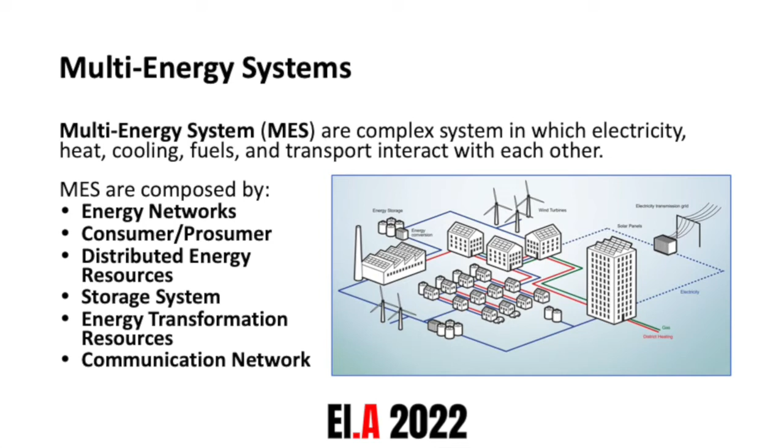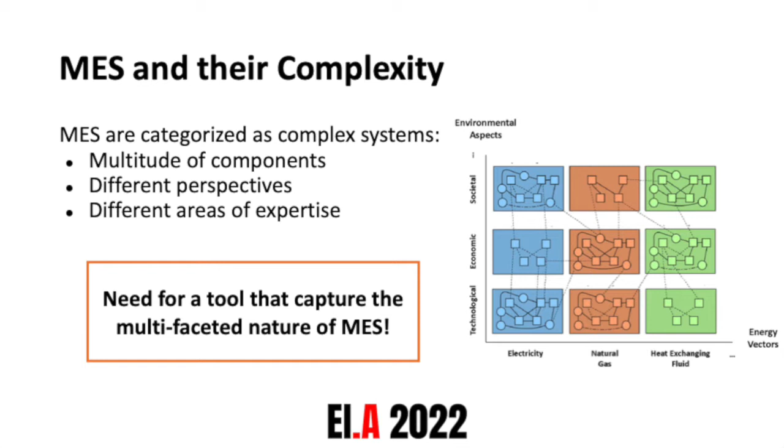Due to the high number of components interacting with each other in this kind of system, multi-energy systems can be acknowledged as complex systems. They can be addressed from several different perspectives. Thus, the study of this system will need different expertises from different fields. Then, in order to properly assess them, there is the huge need of a tool capable of capturing their multifaceted nature. Co-simulation comes into play and answers for this need.

Co-simulation allows to simulate and integrate different domain simulators in the same co-simulation environment. In literature, several different solutions and frameworks are present that address this topic, in particular for what concerns smart grid. Here we present some examples of this, especially focusing on the multi-energy applications. Our objective is to perform a framework comparison in order to better understand them and to help in choosing the right tool for the right application. In particular, we will focus on the scalability.

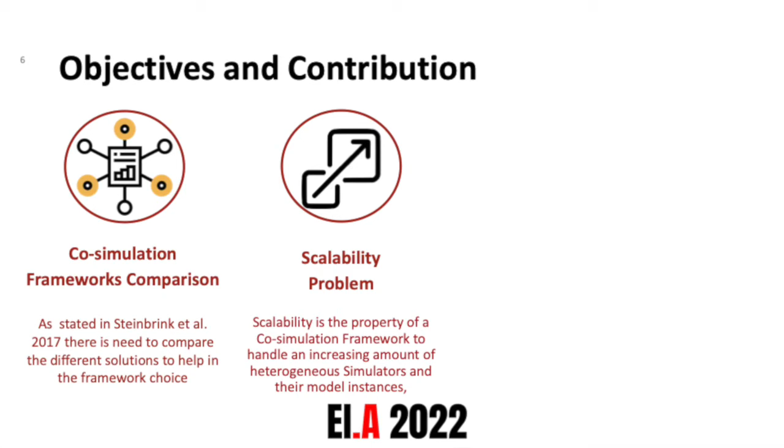Scalability is the ability of the co-simulation framework to increase the amount of heterogeneous simulator and model instances both vertically in the same node and horizontally on different nodes, distributing the problem. The chosen frameworks for the comparison are especially Mosaik and HELICS, which among the multitude of co-simulation frameworks for smart grids are the more generalizable and more prone for the multi-energy system extension.

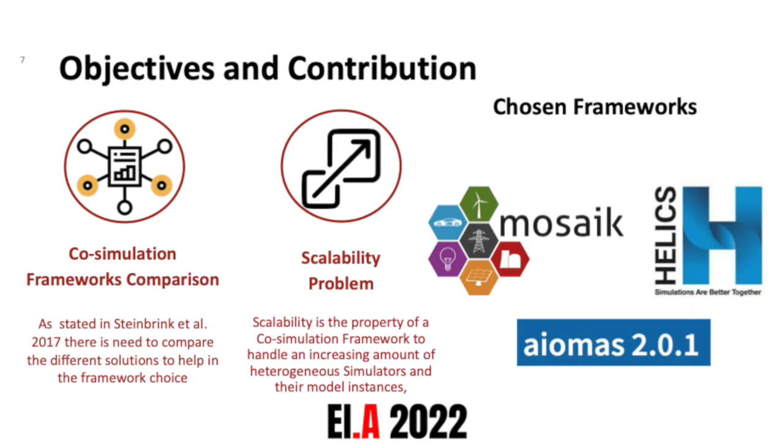In addition to this, we have chosen them because our work is based on the baseline of Steinbrink et al. 2017, which compared high-level architecture standards such as HELICS with Mosaik, without taking into consideration the scalability perspective. Finally, we also included the AIOMAS library, which is a Python library used to build multi-agent systems, and later on we will explain our parallelism between the co-simulation frameworks and the multi-agent system.

Co-simulation frameworks have a common architecture that can be generalized by analyzing its components. Every co-simulation framework must have a scenario, which is the representation of the case study and allows to instantiate simulators and explicitly implement the relationships among them. Then we have the orchestrator, which is the core of the co-simulation because it manages time regulation, synchronization, and data exchange among all the entities involved in the framework.

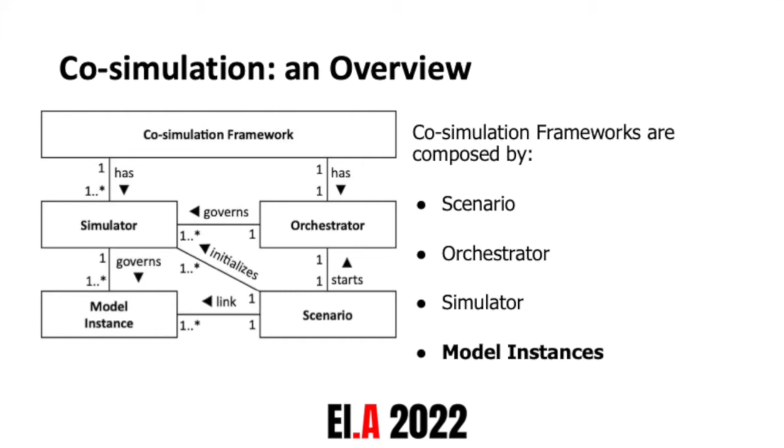Then there are the simulators, which instantiate the model, creating the model instances. They act as interfaces for the model instances to communicate. Then there are the model instances, which are the actual representation of the physical components, and they actually simulate the behavior of the physical components in the real world.

Before starting with the experimental section, we have designed some benchmark configurations. The first one is the classic simulation. When, for example, we are using Mosaik or HELICS, we face this kind of configuration. It consists in a configuration for which each single node can manage only a single process. Each process is a simulator process that can manage more than one model instance.

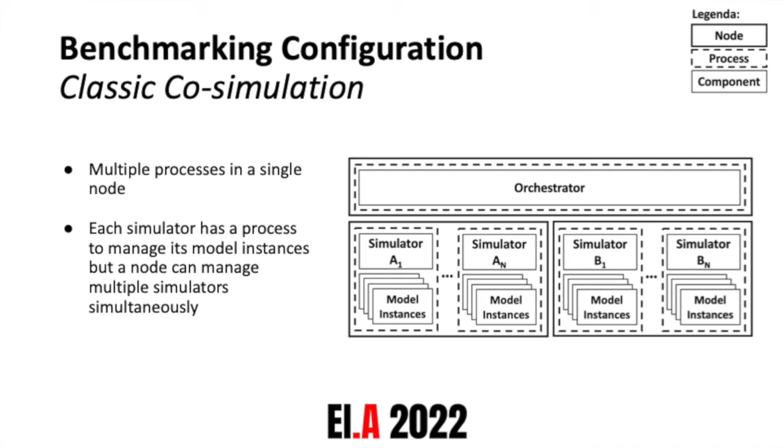Then there is an extension to the previous one, which is the multi-process co-simulation. In this case, it simply enables the nodes to manage more than one process, so we can associate more than one simulator with the related model instances to a single computational node. Then we have the multi-agent as a co-simulation configuration, which is why we have introduced AIOMAS. In this case, we have used the multi-agent system library to build up a custom co-simulation framework. It is distributed and multi-process thanks to the deployment of containers.

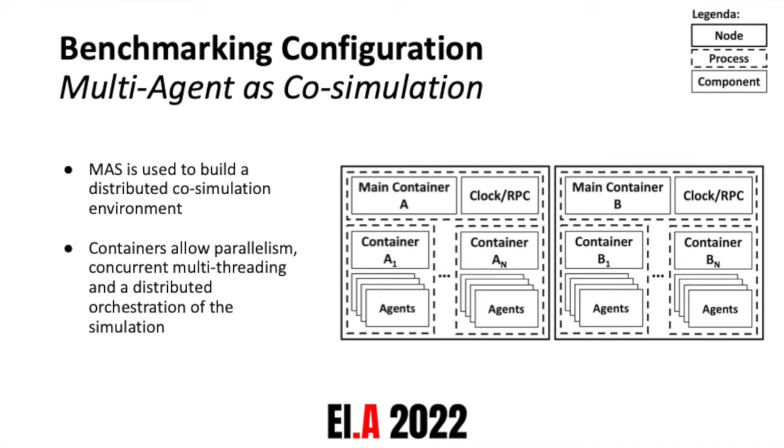Synchronization, data exchange, and time regulation are done through the clock and the remote procedure calls, which are embedded functionalities in the AIOMAS containers. Actually, what we are doing here is to collapse the concept of simulators and model instance in a single entity, which will be the agent. At this point, the agent will be able to represent the physical component, simulate its behavior, and also take the responsibility for the communication itself with other entities.

Finally, the classic simulation with encapsulated multi-agent system is when we want to integrate a fully functional multi-agent system environment into a co-simulation one. In this case, the simulator will act as an interface between the whole co-simulation infrastructure and the whole multi-agent system environment that will simulate autonomously.

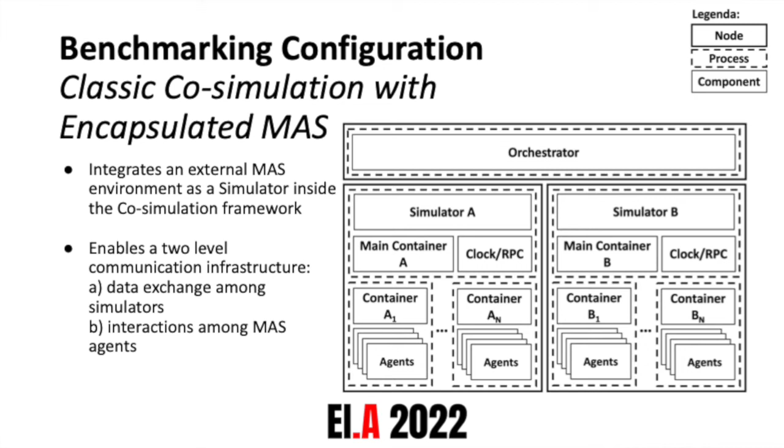Here we present our case study. We chose a multi-model energy scenario, rather simple in order to avoid that complex dynamics affect the timing performances of the simulations. It mainly consists of 4 actors. The first one is the meteo simulator, which is a stateless simulator in charge of communicating weather-like information to the others. Then there's the photovoltaic simulator, which simulates the behavior and estimates the power production of the photovoltaic unit.

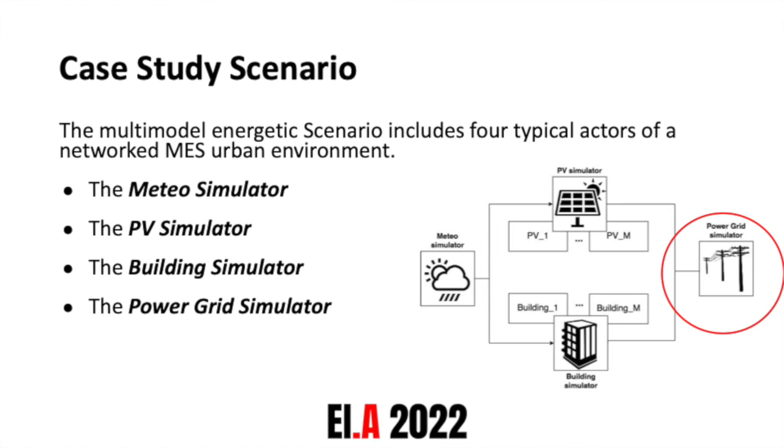And then we have the building simulator, which simulates the thermal behavior of the building, estimating the load demand and translating it into an electrical power load demand thanks to the embedded heat pump model. Finally, the last one is the power grid simulator, which, once it has acknowledged all the data for production and demand from the other simulators, will simulate the physical behavior of the power network.

This table summarizes all the configurations that we have tested in our work. Starting from the top, we have 2 classic co-simulation configurations, one for Mosaik and one for HELICS. Then in third place, we have the multi-agent system as a co-simulation configuration. Then we have 2 configurations for the multi-process co-simulation, one for Mosaik and one for HELICS.

And finally, 2 configurations for the multi-agent system embedded into co-simulation, one for Mosaik and one for HELICS, taking into consideration that for both cases, the multi-agent system environment has been implemented exploiting AIOMAS. All of these configurations have been tested ranging from 1 model instance up to 1 million.

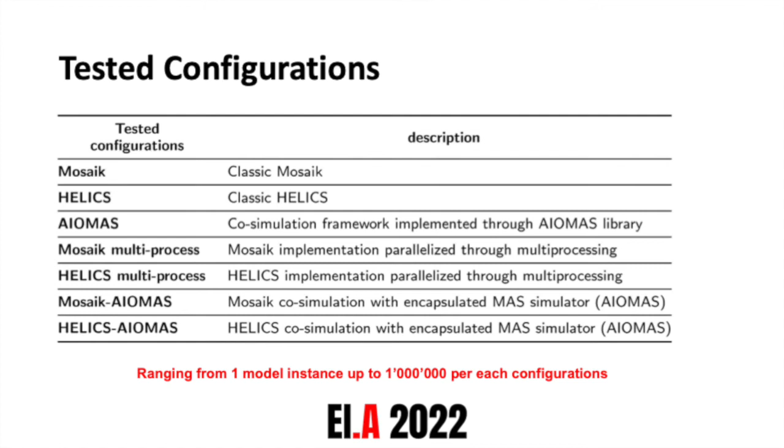In order to evaluate the scaling performance, we designed 3 temporal key performance indicators. The first one is the setup execution time. It takes into account all the initialization phase before the actual start of the simulation. Then we have the average time step duration, which is taken during the simulation, and it represents the average time needed to perform a single simulation step.

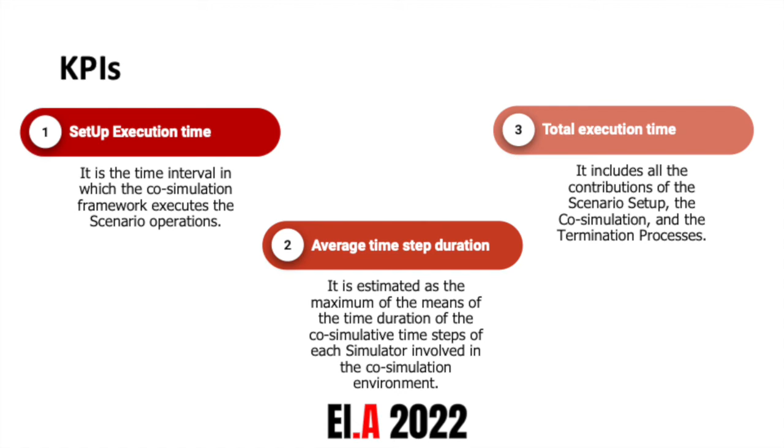Then we have the final one, which is the total execution time, that speaks for itself, but it is the time needed for each configuration to conclude a whole simulation cycle, which in our case is 48 hours with 1 hour time resolution.

Here we have the first results, the setup time duration. As a first consideration, and this will hold for all the next results, we can see that all configurations involving Mosaik, due to an intrinsic limitation of Mosaik itself, cannot scale up above 10,000 instances. For the setup time execution, we can also see that the best performing solutions are the ones with HELICS,

and in particular we can see that below 10,000 instances, the setup time does not benefit from the multiprocess configuration itself. It only starts to take advantage of the multiprocess configuration above 10,000 model instances.

Then we can see the different behavior of Mosaik multiprocess and Mosaik AIOMAS. For Mosaik multiprocess, we can see a huge rise in the setup time duration from 1 model instance to 100 model instances, and this is due to the fact that we are starting the multiprocessing, which requires a bit of overhead in the setup.

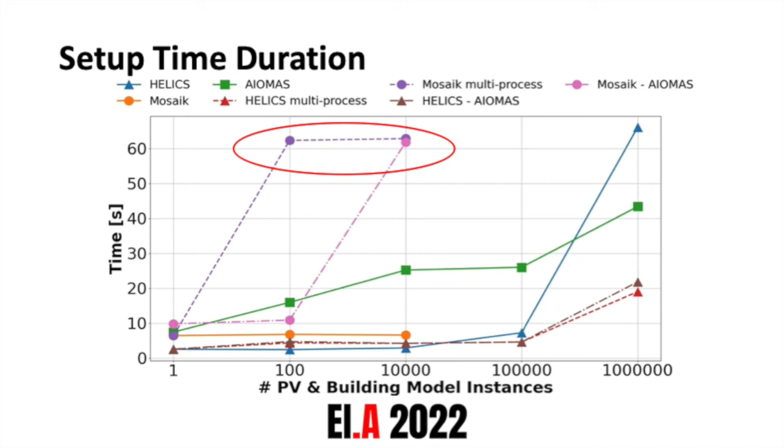This holds also for Mosaik AIOMAS, but having developed the Mosaik AIOMAS configuration with a threshold at which to start the multiprocess, which is 100 model instances, we can see that the rise is just above 100 model instances.

Then we have the average time step duration. This can give us the idea of the actual simulation performance for each of these configurations. And also in this case, we can see that for the really largest scale, HELICS multiprocess outperforms the others. But focusing on the small and medium scale scenarios, we can see that up to 10,000 model instances, the differences are really small. And thus, all of these configurations are suitable for small to medium scenarios.

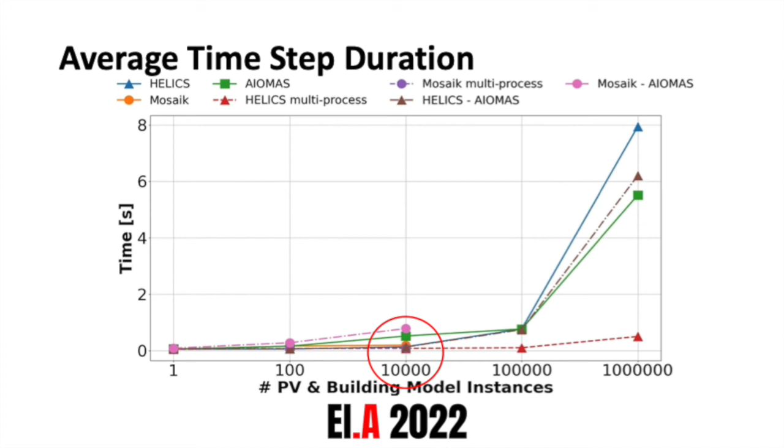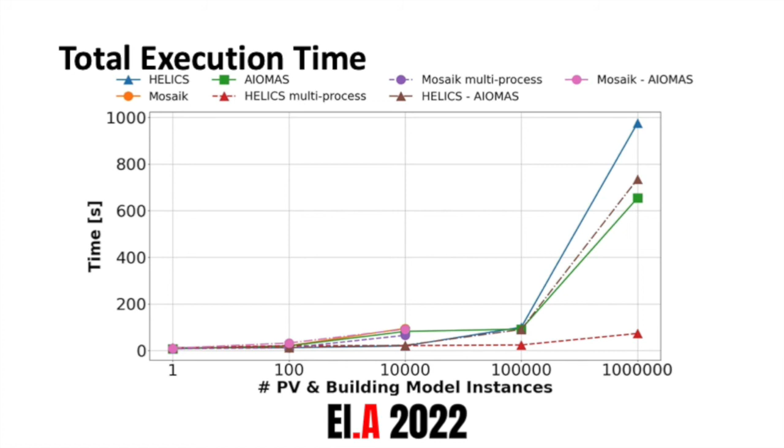Finally, we have the total execution time. This is a composition of both setup time and average time step duration, and it behaves very similarly to the second one because it's the more influencing factor, especially in a simulation of 48 hours. Also from this graph, we can see the outstanding performance of multi-process HELICS.

Finally, to draw some conclusions, we can see, of course, that the best performing tool in terms of scaling up is HELICS with multiprocess configuration. We can also say that the multiprocess configuration increased the scalability performance, especially from 10,000 model instances on. Then we can say that Mosaik is more suitable for medium to small scenarios and is also the most intuitive tool to be used among the ones tested.

And finally, two considerations on the multi-agent system. The first one is that using it as a simulation does not improve scalability performance, but it is suitable in case we want to assess highly customized scenarios, because all the implementation is up to the researcher.

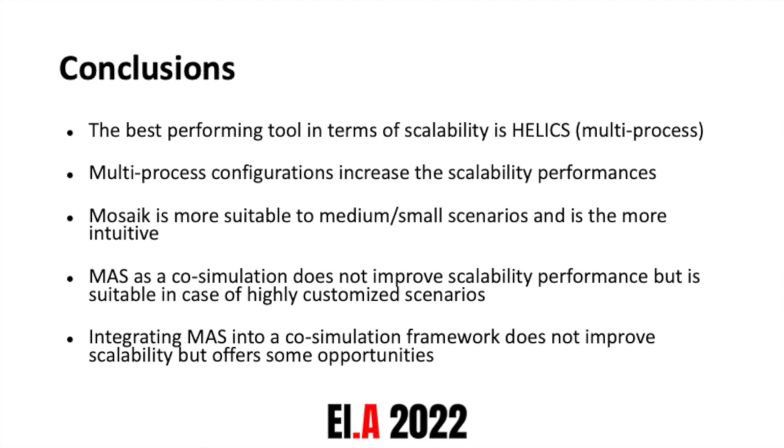Finally, integrating the multi-agent system in a co-simulation framework also does not improve scalability, but can offer some opportunities. For example, if we need to test a really populated and complex system with highly interacting agents and we want it to simulate separately from the simulation framework, we can use strategies like this one.

In conclusion, we have highlighted some future works that we are willing to do. The first one is the standardization of the benchmarking, taking into account the fact that different simulator typologies will have different effects on the performance. Then we also want to test how different workflows and data exchange interactions can affect the scalability performance. And finally, we want to design some ad hoc key performance indicators that are able to take into account the above-mentioned features.